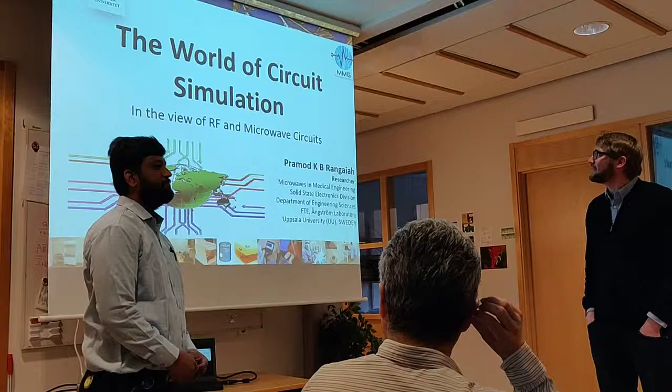Today I will be talking about the world of circuit simulation with respect to RF and microwave circuits. I am Pramod, a short introduction about me.

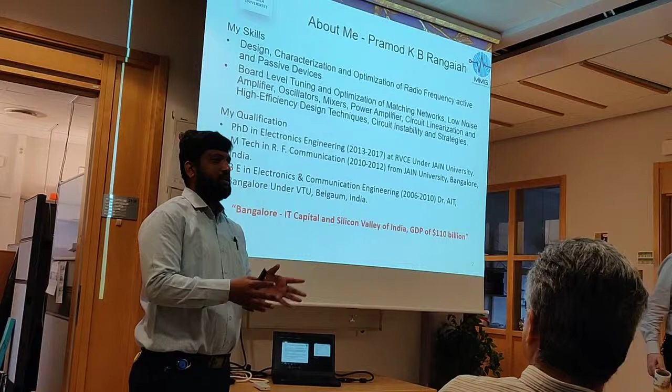My skill set: I'm basically a microwave circuit designer. I'm good at designing active and passive circuit devices, especially low noise amplifiers, oscillators, mixers, power amplifiers, and I'm good at designing matching circuits and making circuit stabilization and board level tuning. These are my skill sets.

Regarding my qualification, I did my bachelor's in electronics and communication under VTU, my master's in RF communication, and my PhD in electronics engineering under Jain University.

I am basically from Bangalore. It is an IT capital and Silicon Valley of India, and it has a GDP of more than $110 billion.

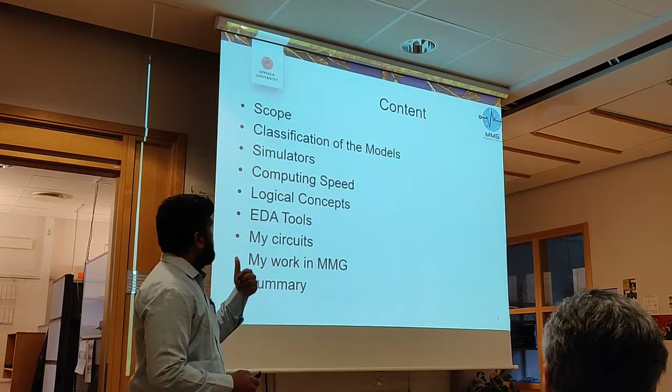So the flow of the presentation is as follows. First, I will be talking about the motivation for this topic, followed by some classifications of the models available for simulators, and I will talk about computational speed and logical concepts. Followed by that, I will describe a few famous EDA tools, and talk about my circuits and the kind of work I will be doing in MMG. I will be discussing these, and then I will summarize my presentation.

If I'm looking at the scope, whenever we have got anything in mind, we have to design a circuit. First, we write on paper or a blackboard. We discuss what should be the input, what should be the output, and what kind of work has to be done. Later on, we straight away start with the simulation.

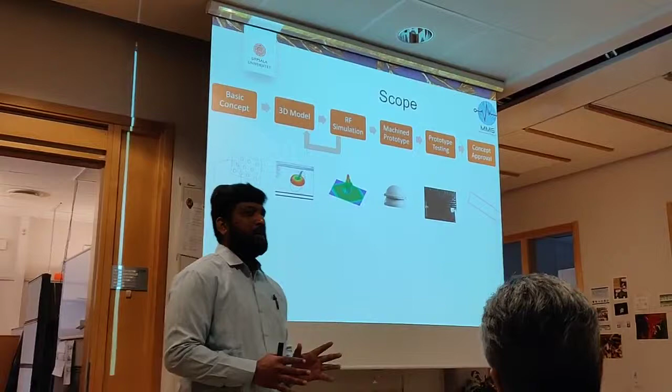In simulation, we look with 3D models, and if it is an RF and microwave simulation, we take it with RF and microwave simulation. Followed by the simulation, we make a machined prototype, which is like fabricating the circuits exactly as done in simulation, and then prototype testing and concept approval.

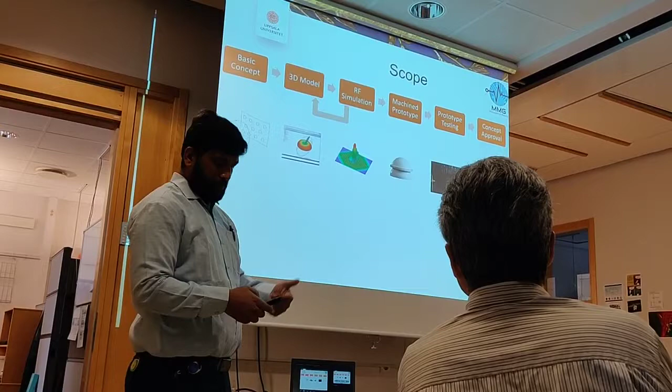If you are looking at these three steps, it depends upon the efficiency of the machine, how it will be fabricating, and what kind of testing method you are using. In this part, the mistake or error can happen up to some 5 to 10%. Most of the mistakes will happen in this simulation world.

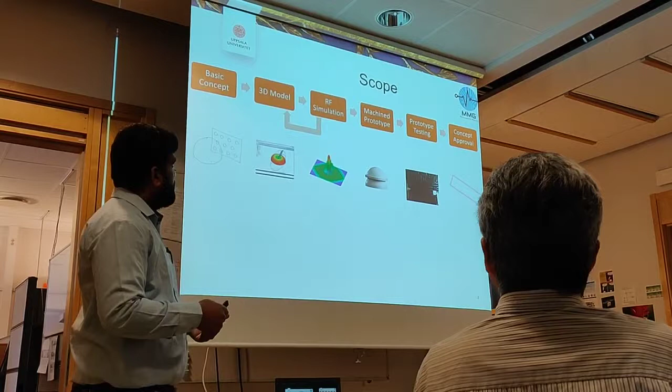And always you can see that there is a loop. That means if you are looking at it in a single pass, you may not end up with a good result, so it is a loop. Every time you want to optimize it and then refabricate it.

So if you look in depth at the simulation, there will be several steps in the simulation: first, system design and design capture, followed by analyzing a simulation, and performing a layout, verification and extraction.

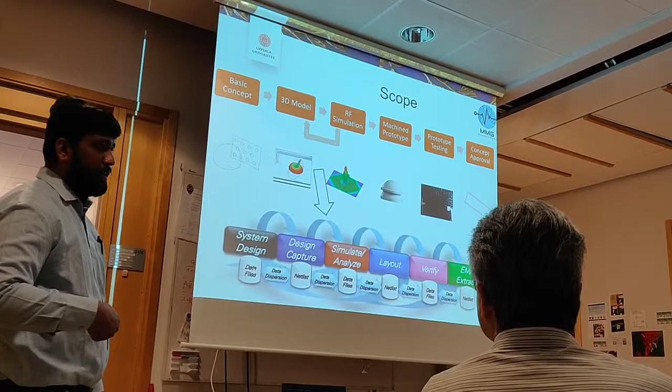If you look at each and every step, there is a connection, and at every step there is a data file that a designer will be using. This is a netlist that the tool creates every time. There will always be interaction and dispersion between each netlist and data at every step, so it will not come in a single shot.

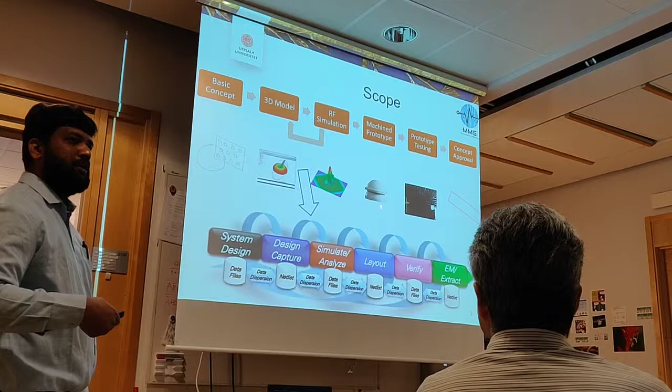Every time, if you don't end up with the proper layout, you have to start again with the system design. It is a loop every time. So you will always be working in this loop, and if you make a single mistake, that will be iterative - it will increase your mistakes, and you will end up with a wrong analysis.

Basically, I will be classifying the models. If you look at electronic circuits, we have time domain measurement, frequency domain measurement, and cumulatively with time and frequency we have got modulation.

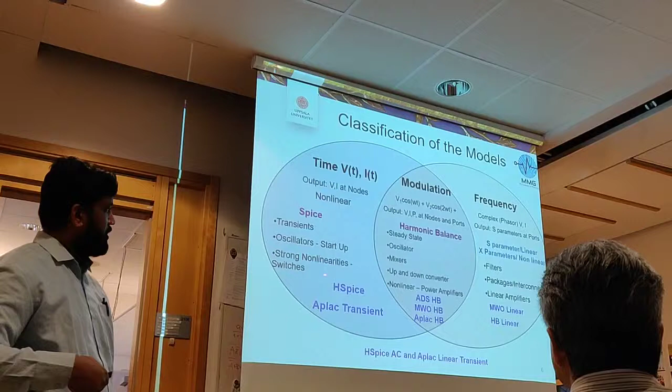If you look at the time domain measurement, it is simple. We have got SPICE models - it's very easy, and less expensive tools are available, and APLAC transient is there. This is generally for low frequency; we can go with time domain measurement. Some theoretical concepts like KVL, KCL, and circuit node analysis all come into picture here.

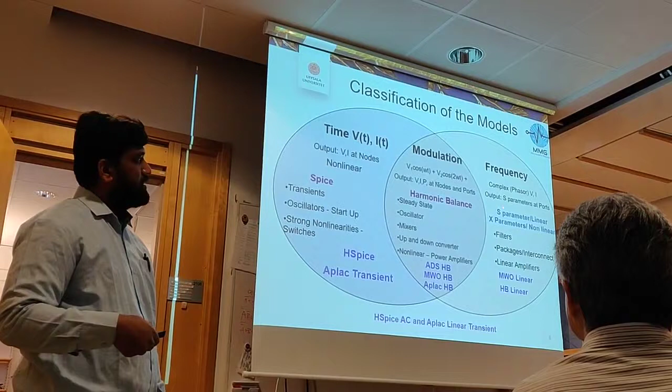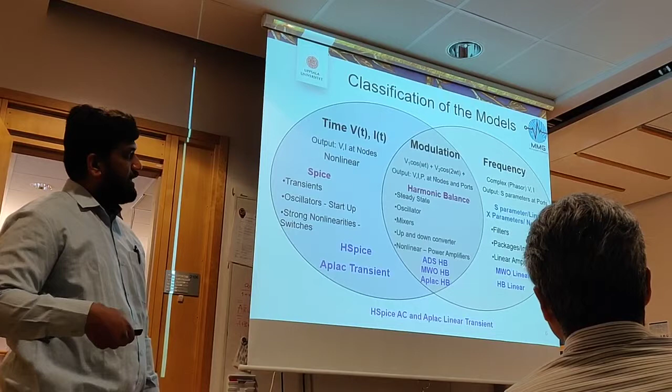And if you look at frequency, the frequency domain deals more with complex numbers, and we have phasors. An important parameter for higher frequency is S-parameters for linear, and there is an advanced version called X-parameters. We have devices like filters, packages, interconnects, and linear amplifiers - these are some devices that come with the frequency domain, and the models available are the Microwave Office linear model and harmonic balanced linear model.

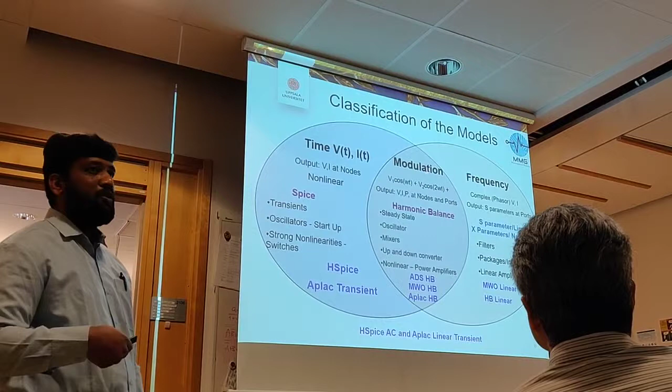There is a common factor between time and frequency domain, which is modulation. If you look at modulation schemes in any communication system, we end up with a lot of exponential or trigonometric equations where we need to account for harmonics, intermodulation effects, and nonlinear effects.

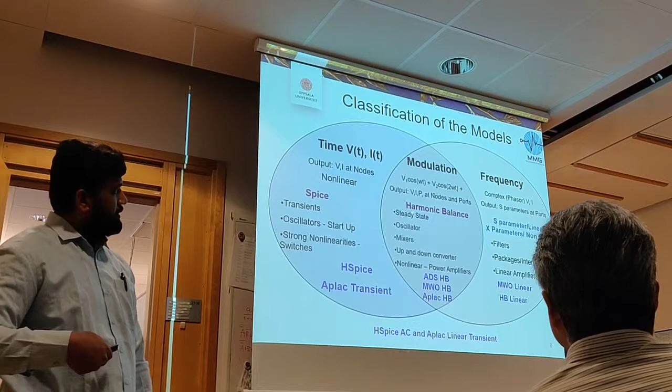For that, we have harmonic balance methods. Models are available, basically like steady state numerical analysis. Some of the challenging devices to design are oscillators, mixers, up converters, down converters, and power amplifiers. This requires huge experience to design properly. Here we look at output as voltage, current, and power at node analysis and also port analysis.

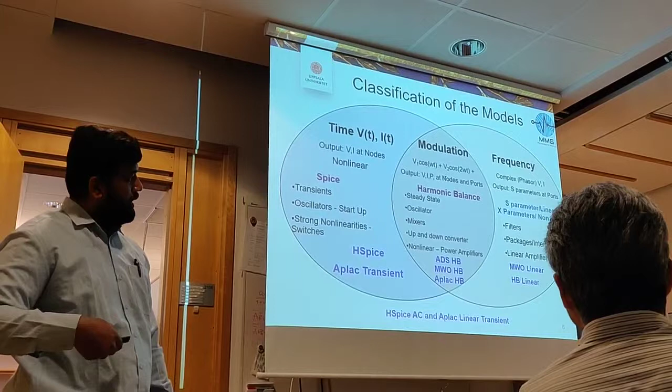Some models like ADS have harmonic balance models, AWR has another harmonic balance method, and APLAC is one intelligent model. Out of these, we have SPICE and APLAC linear transient models. These can sometimes be faster and less complex compared to harmonic balance models, but they will not handle strong nonlinearity well.

Now classifying the linear simulator models. It will have simple measurements like gain, noise figure, and some circles where you play with a Smith chart. That kind of linear analysis can be made with linear simulation.

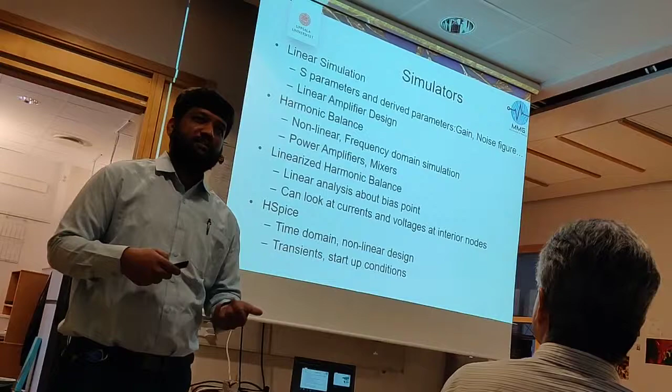S parameter analysis, it's like small signal analysis for circuits. Harmonic balance means we can handle nonlinearity of circuits, where we can understand harmonic effects, intermodulation, dynamic range of power - everything can be measured, especially for devices like power amplifiers and mixers.

Linearized harmonic balance is used when you're working with active devices and want to judge the biasing point, different DC levels, different current levels, or internal nodes - for that we go with the linearized harmonic balance method.

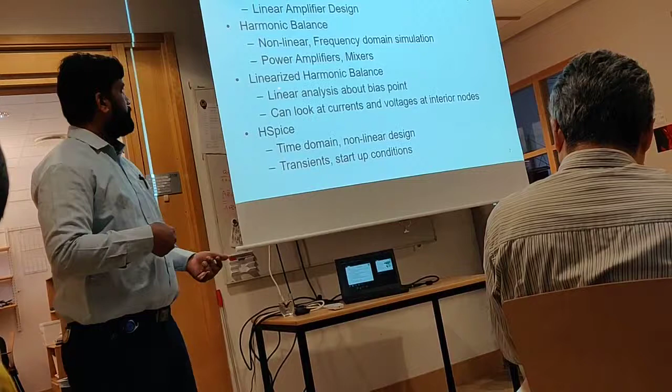HSPICE is simply an advanced version of the SPICE model. It can handle some nonlinearity design, oscillation startup conditions, and transient analysis.

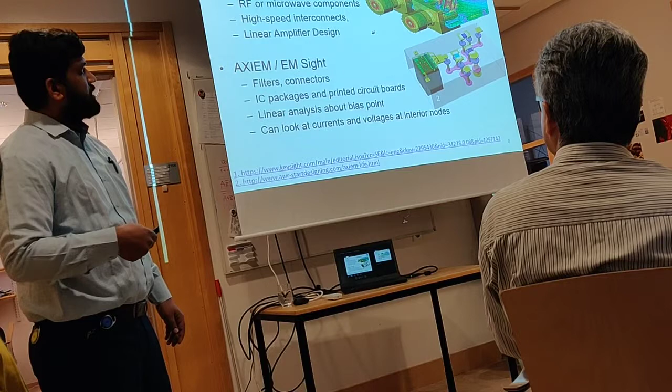This is an entirely different world. Most of our team uses a lot of electromagnetic simulations. Once you look at EM 3D electromagnetic structures, these include microstrip lines and connectors - these are simulated using various advanced techniques.

Those designing antenna arrays, RF component filters, high-speed interconnects, and linear amplifiers will go with 3D electromagnetic simulations.

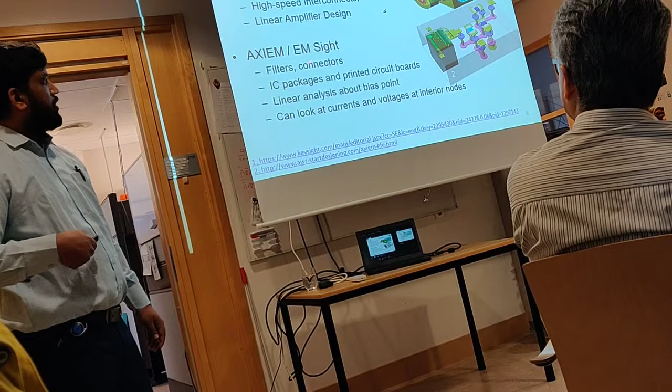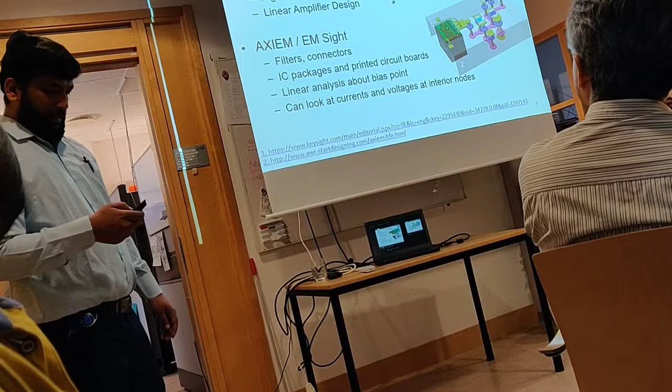Based on this, I made a major focus on 3D electromagnetic simulation because most of our team works on this, so I made a separate class for it.

I made a chart covering 2D to 3D, and based on computational time, I classified it into basically 3 types.

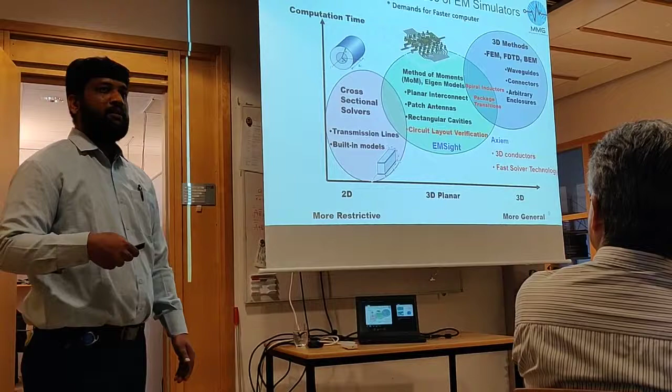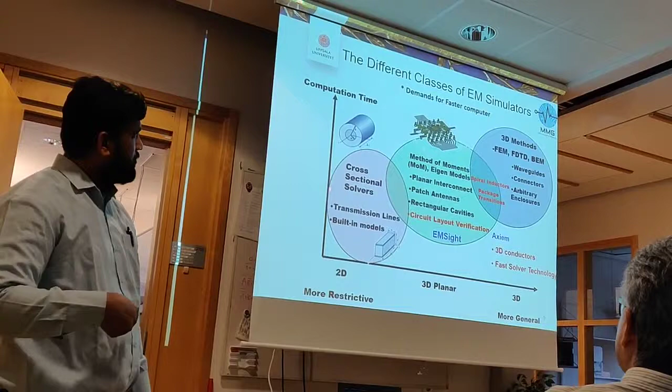The first type involves simple transmission line concepts with 2D analysis - for example, a microstrip line and a coaxial cable. Transmission line concepts use a cross-sectional solver method which is completely 2D and requires less computational time.

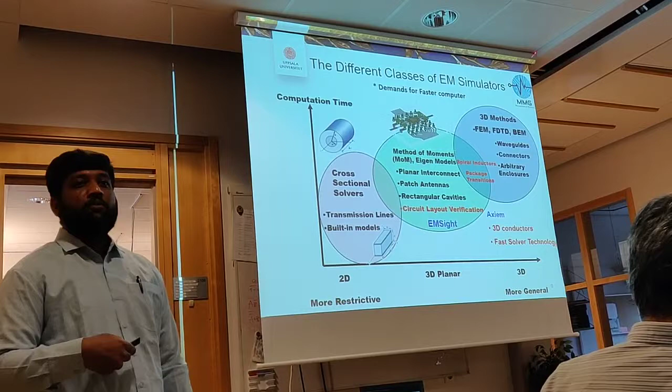The next type is 3D planar or 2.5D, where it looks like 3D but the evaluation is not completely 3D. We have mathematical concepts like method of moments and eigen models, used for planar interconnect, antennas, rectangular cavities, circuit layout verification - this is the 3D planar concept.

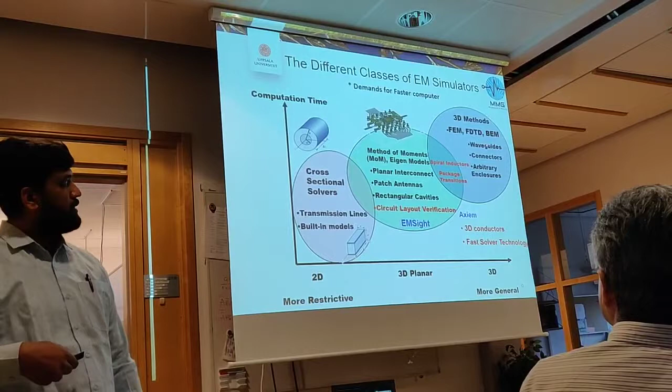The third is a completely 3D method, using mathematical techniques called FEM - finite element methods - along with finite difference time domain method and boundary element method. Here, if you want to design filter lines with waveguide structures and similar components, you have to use proper 3D analysis.

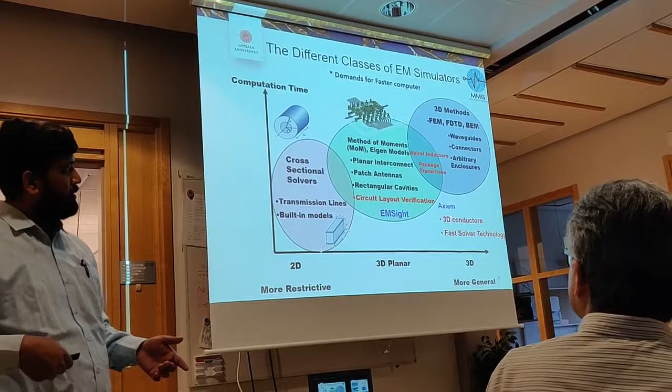And this part I will again go into more explanation. I want to distinguish between, for those who are designers, you have to consider these core techniques.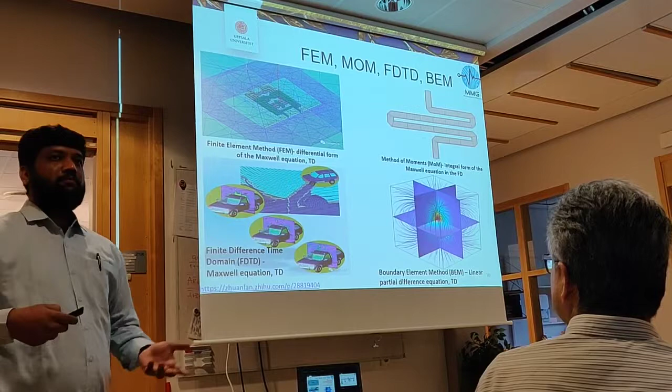Whenever you are making this one, that is the finite element method, it will take any microstrip geometry or any kind of structure, divide it into multiple tetrahedrons, and analyze it. It will apply Maxwell's differential form equation in the time domain and analyze it.

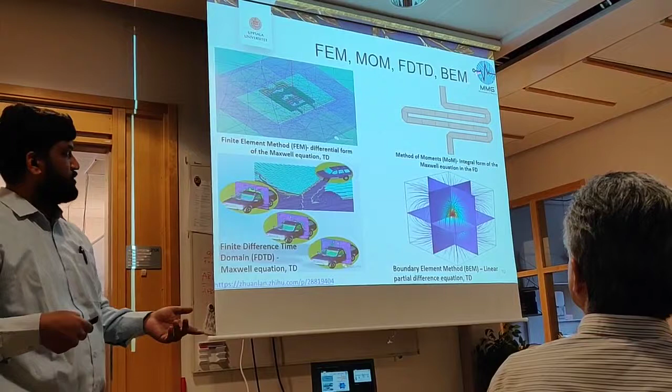Whereas this method of moments is available in HFSS. And if you are looking at tools like ADS and AWR for the basics, it will make it faster since it is a 2D solver. You can see the structure is taken and cross-sectionally divided into a number of elements. This is called method of moments.

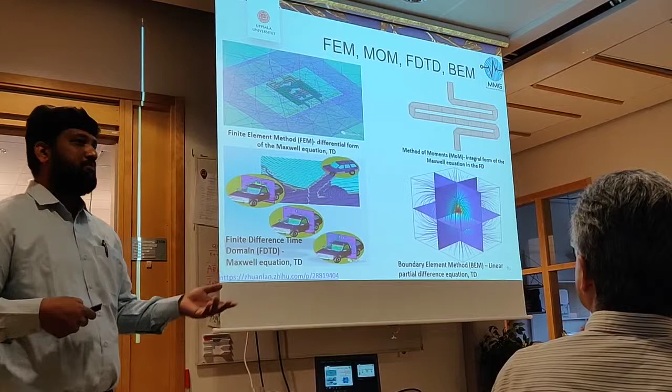It will apply the integral form of Maxwell's equation in the frequency domain. It is faster, but you can use this up to 2 or 3 gigahertz. You can end up with a good result, no issue. This is basically when you are dealing with a lot of complex active circuits and all, we can go for it.

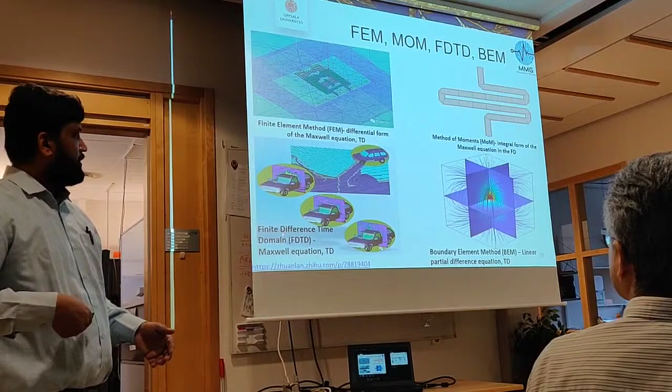Whenever we are having a structure, say we are looking at the electrical characteristics of a car or airplane or any different geometry in the world, you can go with FDTD, the finite difference time domain method. This is a completely 3D evaluation.

If the structure is taken, the evaluation is done with finite difference time domain, and it will apply Maxwell's equation in the time domain.

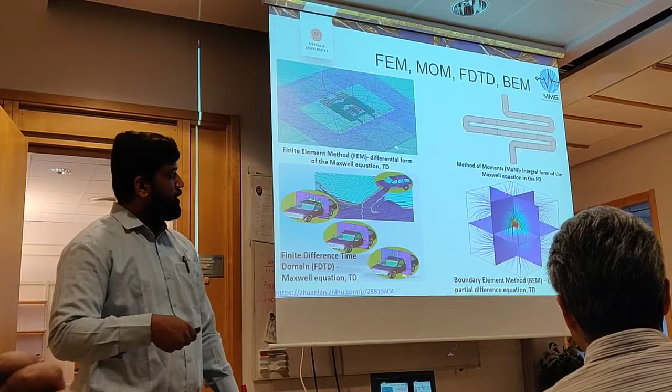And this is one more advanced method, the BEM, the boundary element method. For any geometry, they will make it one enclosure, not always cubical, it can be spherical or cylindrical. It will create a boundary and analyze in various directions, applying the linear partial differential equation in the time domain to make an analysis.

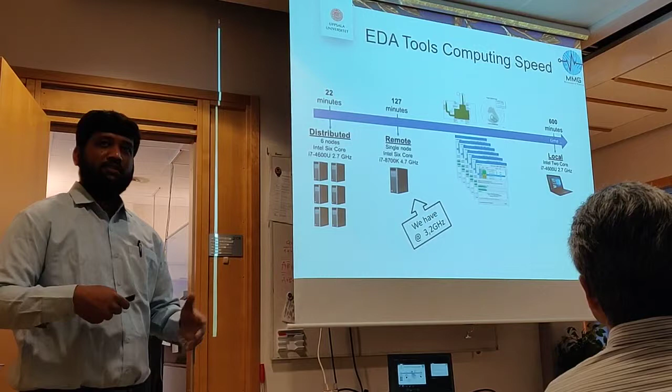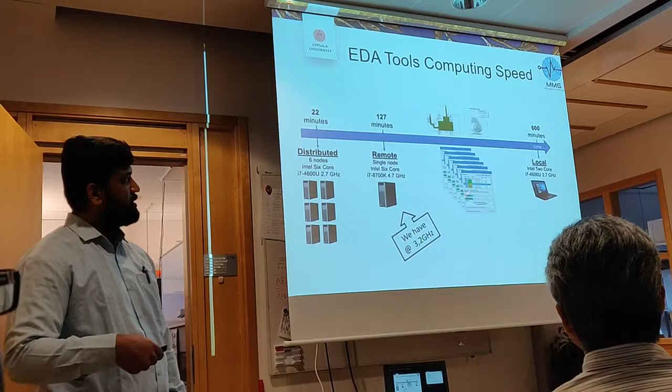And if you are looking at most designers working with EDA tools, they will complain that the software is slow and not working well. I would like to say that if they are using a dual core i7, it will take a lot of time when making EM structure simulations, because in the background there will be a lot of netlists created, and every time it has to consider the data file.

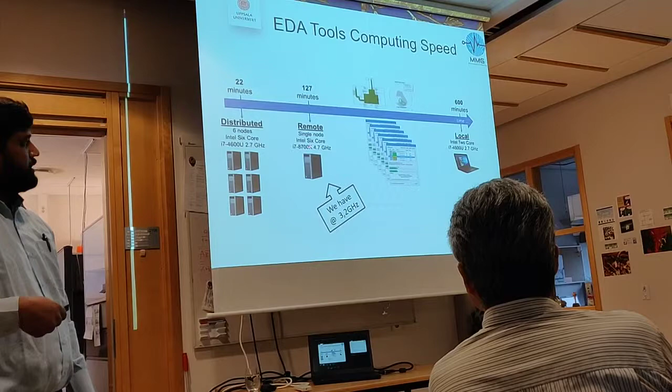Lots of complex calculations happen in the background, so it will take around 600 minutes if you have a dual core. This is a system I have in my lab, which has a single node with 6 cores at around 3.2 gigahertz frequency. It will take around 2 hours if you want to simulate complex geometric structures.

And if you look at a machine with 6 nodes and 6 cores, these are good processors that can handle your software very fast. Whatever software you are using, if you go with this kind of machine, it will be better. And sometimes it demands a bigger RAM if you are using something like HFSS.

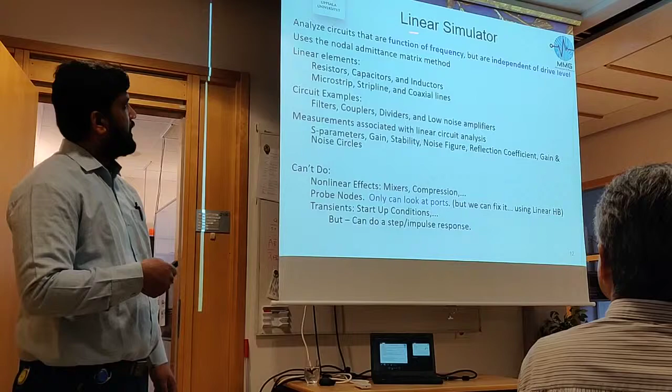In a linear simulator, again, if you are playing with elements like RLC and microstrip geometry coaxial lines, you can go with linear simulators. And if you have devices like filters, couplers, dividers, low noise amplifiers, and their measurement is only small signal analysis, you can go with the linear simulator.

Because this kind of linear simulator cannot handle any compression point analysis, dynamic range, or non-linear characteristics. If you perform any non-linear characteristic analysis with this kind of simulator, you will end up with a wrong result when compared to the fabricated result.

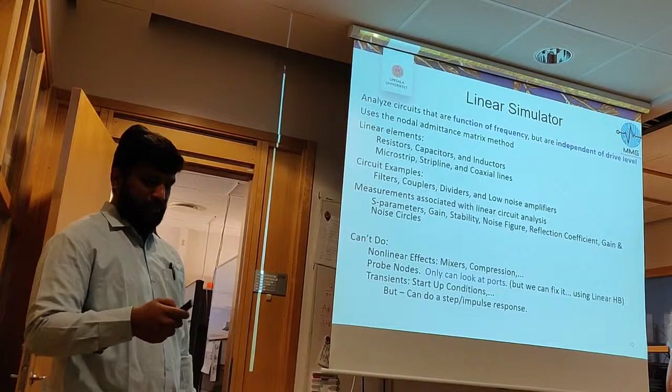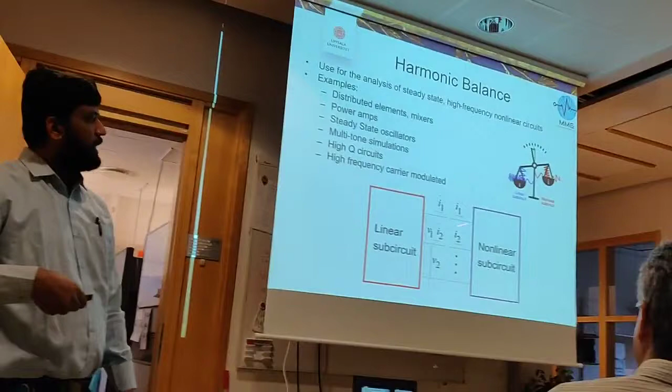And this is harmonic balance, especially made for non-linear circuits. This simple picture shows that you should balance linear or non-linear circuits. Suppose linear circuits have RLC, and you also have non-linear characteristics with some transistor and all, you should interact every time and perform the calculation properly.

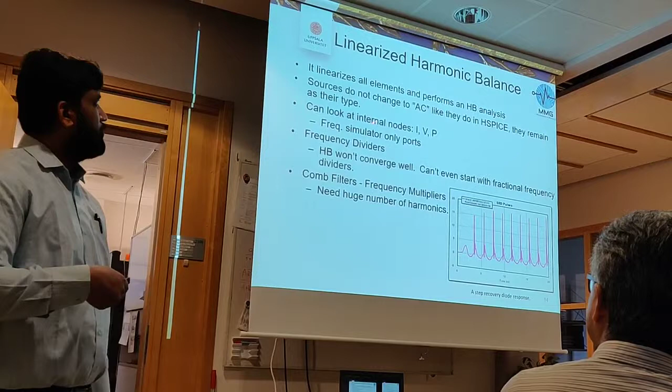So some devices like mixers, power amplifiers, oscillators, multi-tone simulators, high Q circuits, and high frequency carrier modulators go with harmonic balance. And there is one more linear method for this. If you want to do more time domain analysis, you can go with the linearized harmonic balance method, where sometimes it cannot handle this kind of issue.

Say there is a step recovery diode response, it should not be like this. It was showing a wrong analysis. Sometimes if you are using a wrong model, especially for semiconductor device analysis, it will end up with a wrong analysis.

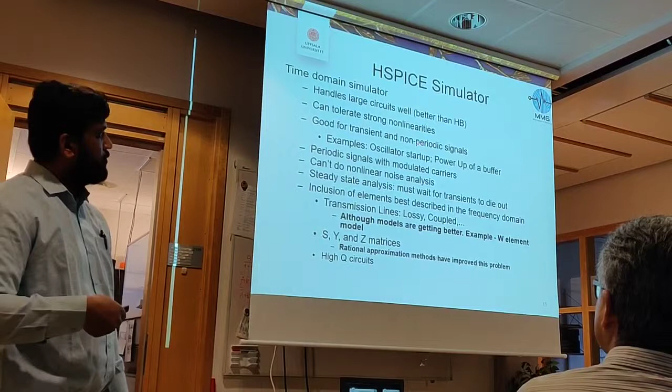This is just an advanced version of your SPICE model, where you are looking with time domain analysis, where you can have not only some matrix, but also oscillation startup, and some non-linearities measurements it can tolerate. So it's quite advanced than your SPICE model.

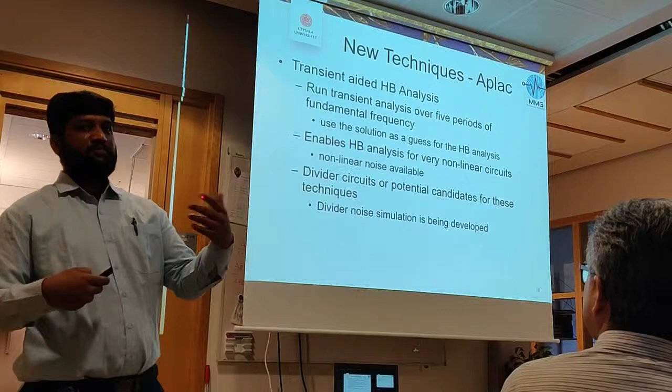And this is a new technique, the APLAC model. It is a very intelligent model, but the problem with this model is the vendor has to provide an APLAC model for your design. Say you are designing an amplifier with respect to one Philips company, say a Philips with some FET model. That vendor has to provide this model for your particular tool. Then you can make a good analysis.

Or else you should look at the data sheet and change the parameters of existing models like the TOM model or any Gummel-Poon model. Any of the existing models, you have to change the parameters and you can use it.

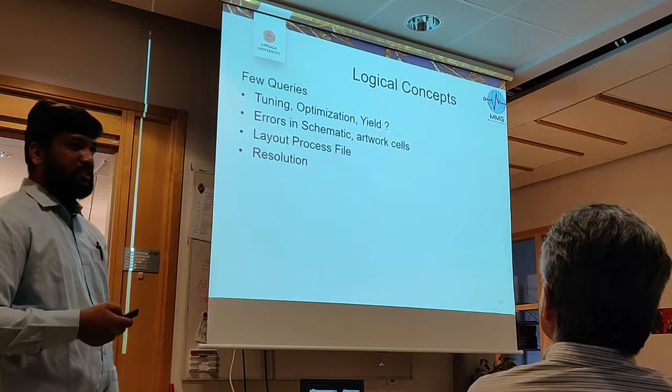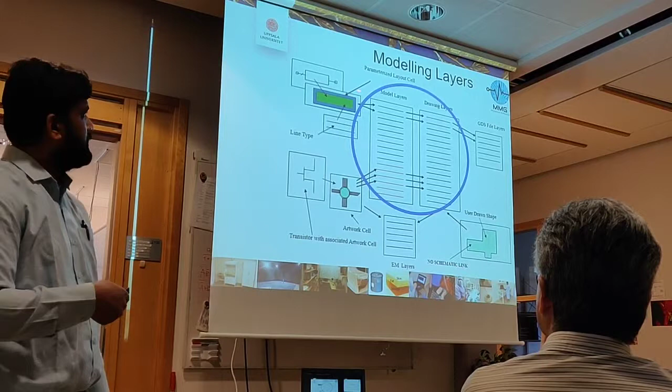I just want to highlight this one. Whenever you are using any of the EDA tools, if you just drag and drop, looking at a schematic, it looks like this. If you download it from the internet, the artwork cell will look like this, and the lines will look like this. After drawing, if there is no schematic link, many times it will show a different color and so on.

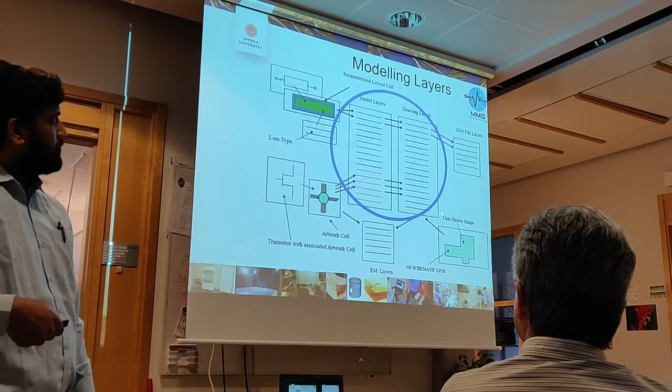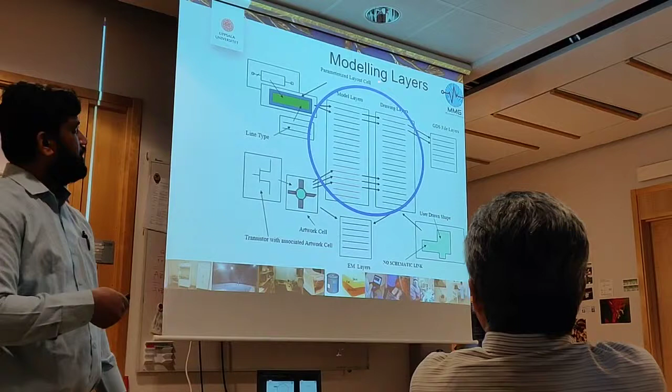If the interaction between a drawing layer and model layer is not proper, then this GDS file will end up with a wrong Gerber file. Sometimes it's a bad idea to download models from the internet and directly put them in your design without proper linkage between model layers and drawing layers, then the analysis will be wrong. Even though circuits look better in your schematic and layout, once you fabricate it, you will not end up with a proper testing prototype.

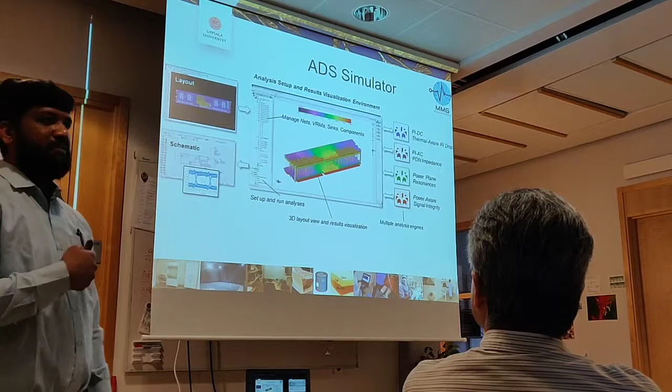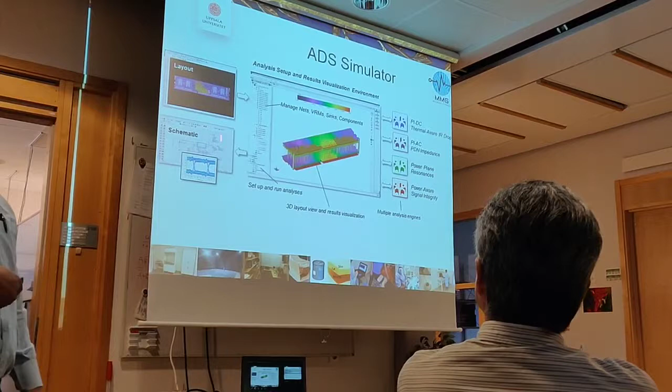I'd like to show some famous EDA tools. One is ADS, which has system level and component level design. Its specialty is thermal measurements, power plane, and signal integrity and power integrity models. It's a special tool that can have a lot of complex models. It can simulate various geometric structures, has a 3D version, and has a good connection with schematic and layout.

And one more is AWR, also a very big, good industry player. They provide different tools for different kinds of elements: MicroWave Office especially for RFIC, MMIC, monolithic microwave integrated circuits, PCB design, and module design. And VSS they provide for system level design like wireless communication radar systems, and they provide Analog Office.

It is for VLSI and very small structure designs. And if you look at Analyst and AXIEM, they provide tools especially for analysis of antennas and synthesis optimization. They have different tools and provide different licenses.

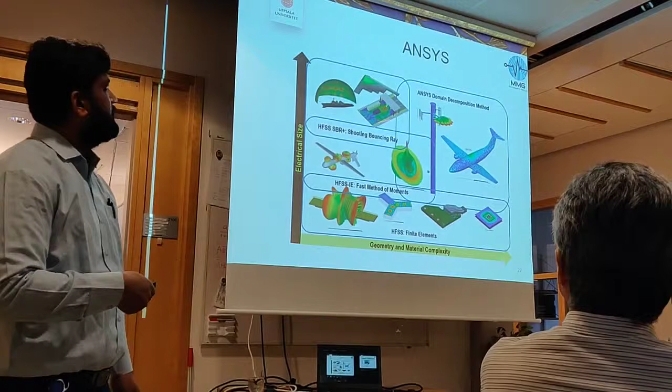There is one more tool called ANSYS HFSS. This tool has some specialty: there is no geometrical or material complexity, whatever the electrical size may be, it can simulate. It can simulate from micron size circuits to airplane size, and it can handle various structure simulations with very complex simulation methods.

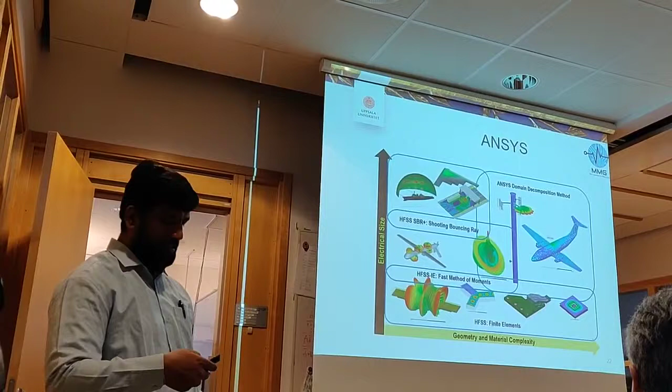And if you look at CST, even this is available in our lab. CST and HFSS work with the same kind of application, but the mathematical computing is different. I'll just be highlighting features in upcoming slides.

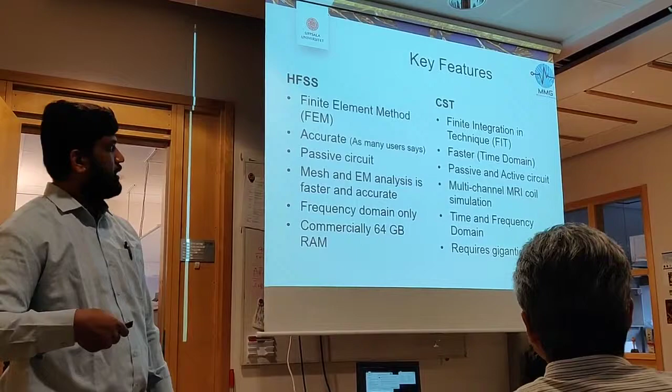If I'm just highlighting key features of HFSS and CST: HFSS goes with the finite element method, and CST goes with the finite integration technique. Many times people will say one is more accurate, getting good results - I don't advocate any particular tool. CST is faster because it does analysis with the time domain.

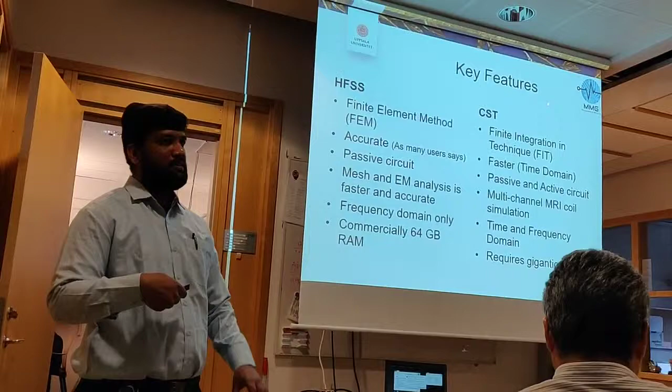If you're looking at HFSS, it always deals with mesh and EM analysis, faster and accurate. Here we'll be having multi MRI coil, because it can have a complex model with FDTD. It can have different 3D structural simulations, so it will have multi-channel MRI coils.

HFSS can only handle the frequency domain, but CST can handle both time and frequency domain. The commercial version always demands a bigger RAM - 64 GB RAM is the minimum required for this tool, and it demands a good processor.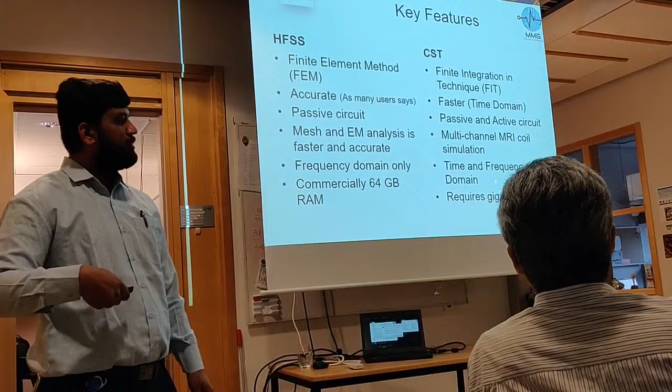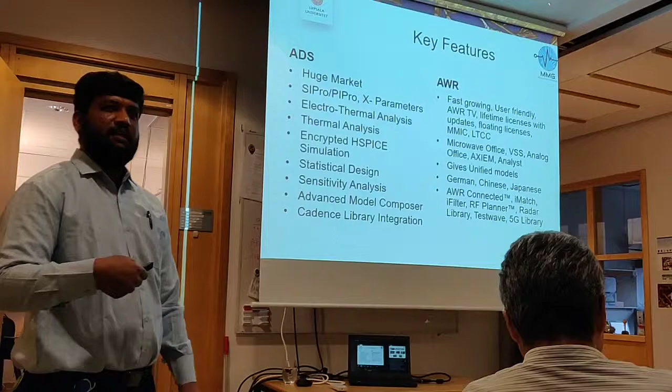One more comparison of key features. I like to compare these because they work in different sectors: ADS and AWR. ADS has a huge market and makes hardware. They have a good collaboration with Agilent and also Cadence. Cadence mainly deals with VLSI as a big industry, and it has a specialty in signal integrity and power integrity, and it can do good thermal analysis for circuits.

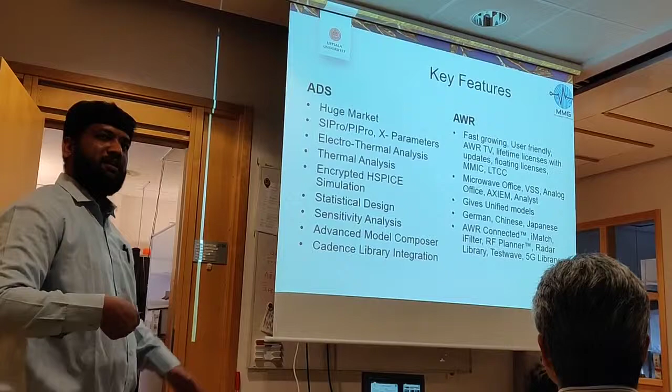It started with HSpice, which gives good time domain analysis, and statistical design and sensitivity analysis can be done.

AWR is fast growing and user friendly. It has floating licenses and deals with MMIC and LTCC. This is advanced, upcoming technology where circuits will be smaller than what we see today. It has different products, and it has a unified model, meaning it's saved in a single unified format rather than different kinds of file sets.

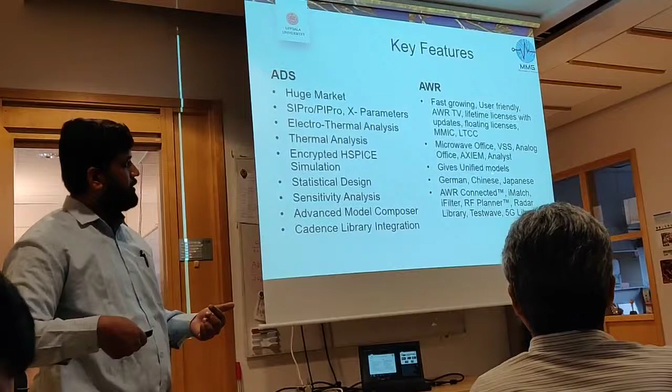Most researchers contributing, like German, Chinese, and Japanese researchers, work more with AWR. We also have iMatch and iFilters, which are intelligent wizards where ready-made circuits are prepared for your design. If you don't have a strong theoretical background of a device but still want to design, it supports you a lot.

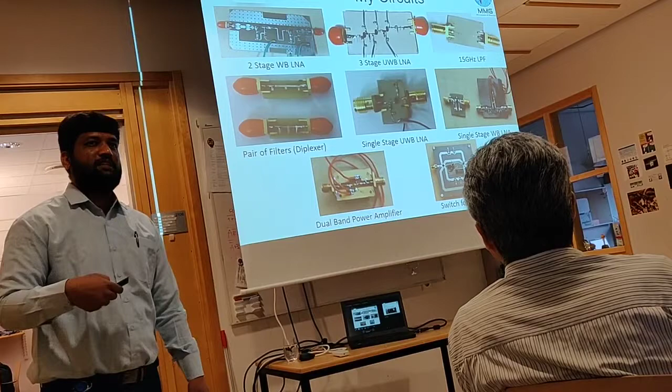It also has a good radar library, TestWave, and 5G library. And these are my circuits. I started my career as an RF circuit designer with National Instruments in Bangalore.

I was initially working on model preparation, writing code for models for tools like AWR. Later in my research I started designing devices for radar applications.

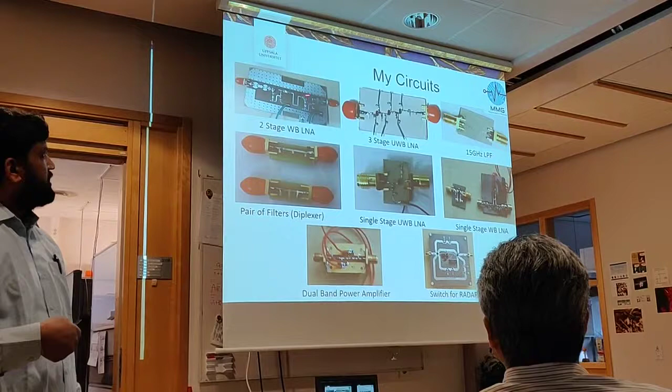This is a wideband low noise amplifier for radar application. This is an ultra-wideband design for high precision radar, and this 15 GHz low pass filter is also for radar application. This is a small radar design for weather radar.

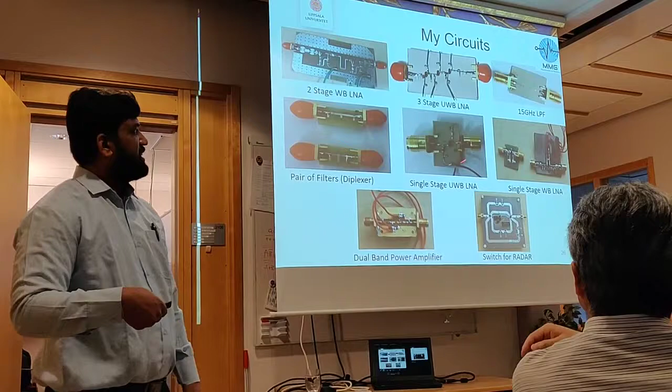I prepared a pair of filters for a diplexer application, and this single stage design is for a base station ultra-wideband LNA. This is also a wideband LNA.

This is a power amplifier with 40 watt output, and this one is not entirely my contribution—I designed only the matching circuit for the switch radar in one application. The rest are completely my design.

In MMG, this is a small group. I'm working on sensor tile applications and application-specific baluns with filters I'm designing, and I'm designing a microwave bridge for sensing applications, including sensing burnt skin tissues.

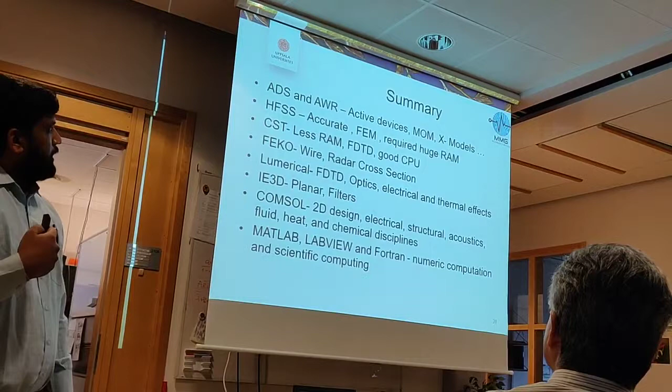I'm also looking at what kind of measurements we can do and what kind of RF circuits we can prepare for it. In total summary, I'd like to say a few things.

Since I work with numerous software tools, I recommend: if you're dealing with active devices, you can go with MOM or X models, using these two tools. If you need strong electromagnetic simulations with good accuracy, you can go with HFSS, and use FEM methods.

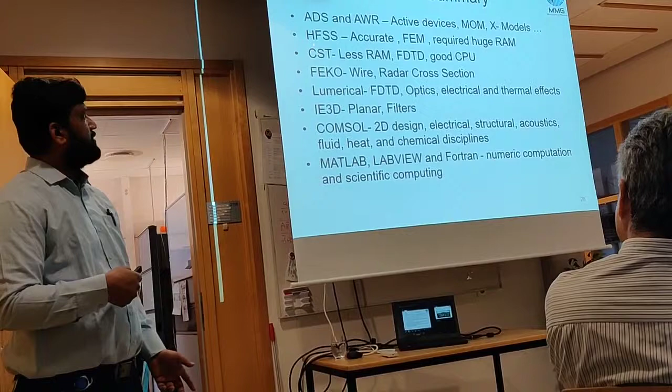If you need less RAM and a good CPU, go with FDTD, which is a more advanced method for 3D simulations. You can use CST for this.

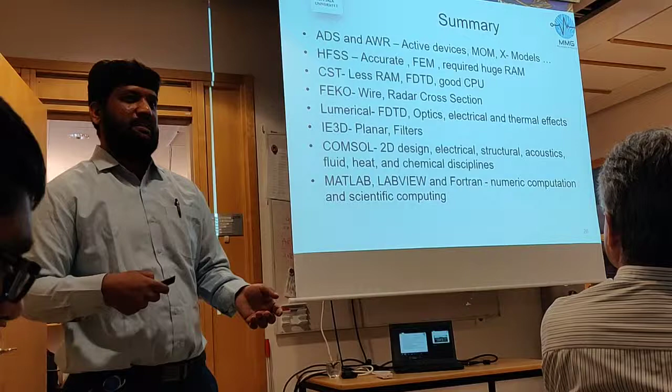If you're only dealing with coaxial cable, wire connectors, and radar cross section kind of work, you can use a FEKO tool.

If you're looking at optical, electrical, and thermal measurement with FDTD, you can go with Lumerical. There are also less expensive software options.

If your design involves planar 2D structures with filters, you can go with IE3D, and COMSOL, whenever you have a mechanical specification and electrical structure...

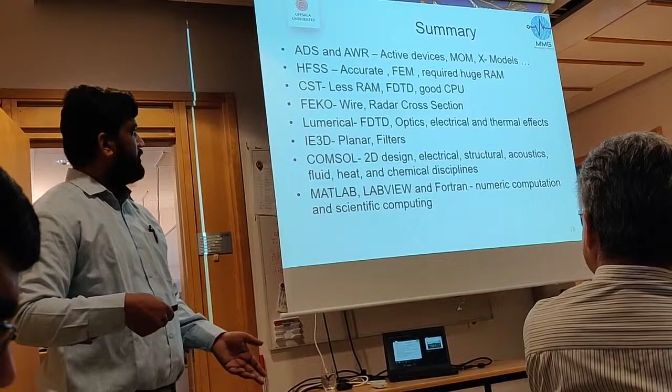For many measurements with 2D analysis, COMSOL can support that. And if you're only interested in the simulation model and not in making a machine prototype, you can just go with LabVIEW or MATLAB.

This makes numerical, computational, and scientific computations quite easy. You can make only simulations with it; it cannot create good hardware.